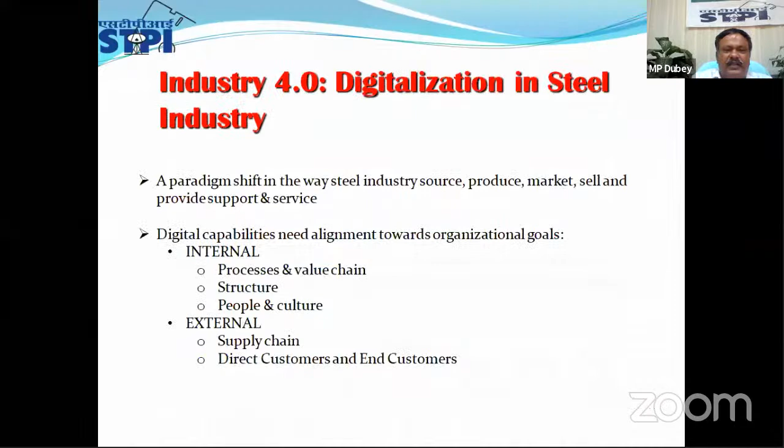So this is already something you have spoken about. Basically, in the digital age, an organization should adjust their production and logistics systems to meet new technologies. The main criteria are cost efficiency, customer centricity, and flexibility of production. Looking at overall growth, Industry 4.0 will play a very vital role in the growth of any company in terms of productivity and profitability.

So that's how Industry 4.0 comes in, with 9 different areas we are working on, called the TIED Center of Excellence: industrial robotics, where we are doing a lot of innovation and simulation work, system integration, Internet of Things (IoT), industrial IoT, artificial intelligence, industrial drones, cloud computing, additive manufacturing, industrial 3D printing, and big data.

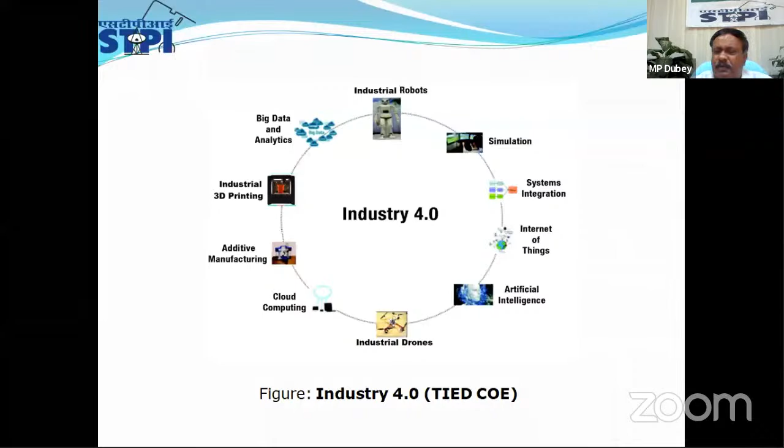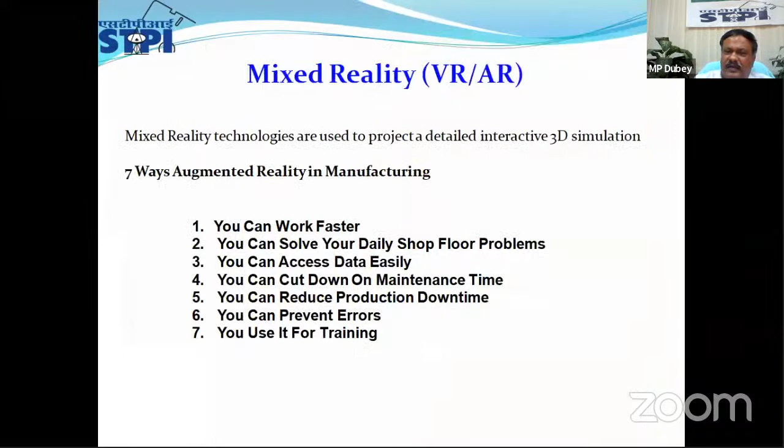With this, we have recently added AR and VR. These are all emerging technologies, and how these technologies will be implemented in the steel plant overall for the growth of Industry 4.0 - that's the thing I'd like to show you. The Government of India is already putting a lot of effort, it has come in the budget as an emerging technology. Wherever AI, ML and bioinformatics kind of things we are using, we are giving more and more incentive to those industries. So this is one new thing, AR, VR, which we have added.

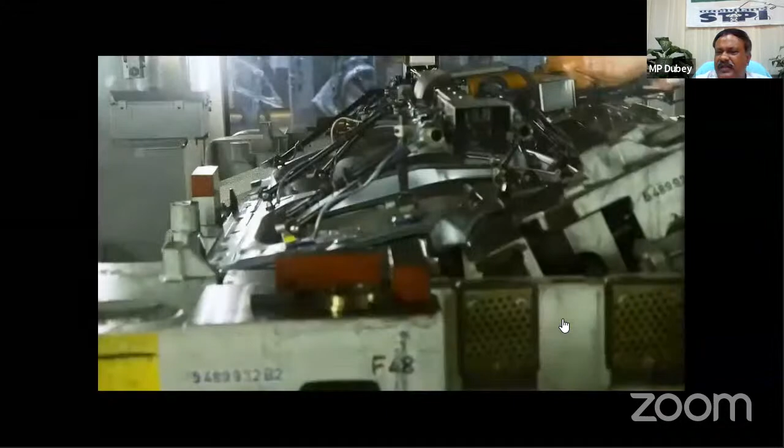Because of time constraint, I am not going to show you the whole thing, but basically through Google Glass you can simulate the activities. Cloud computing nowadays, wherever your developments are going on through technology, you can do it - like car manufacturing - and overall everything is correlated with the data. AI, data, IoT, when they come together and go to the manufacturing side, it will create a very win-win situation for the industry.

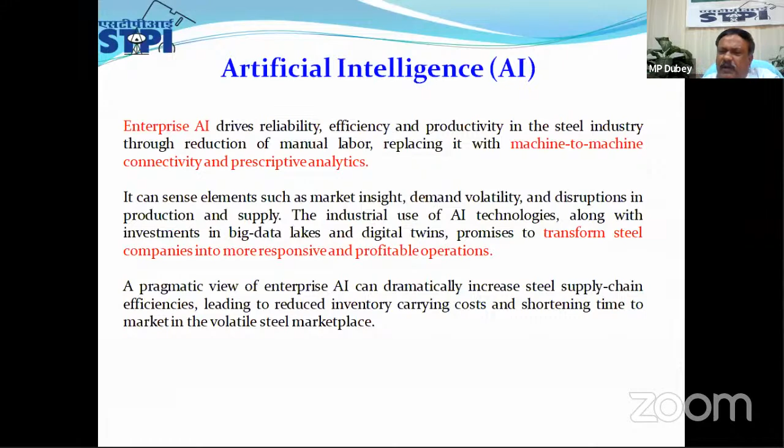This way, artificial intelligence - whatever Center of Excellence we are coming with, I will cover in another two slides. AI is our main focus, and the Government of India, Ministry of IT, is putting more and more effort on AI-based implementation of Industry 4.0.

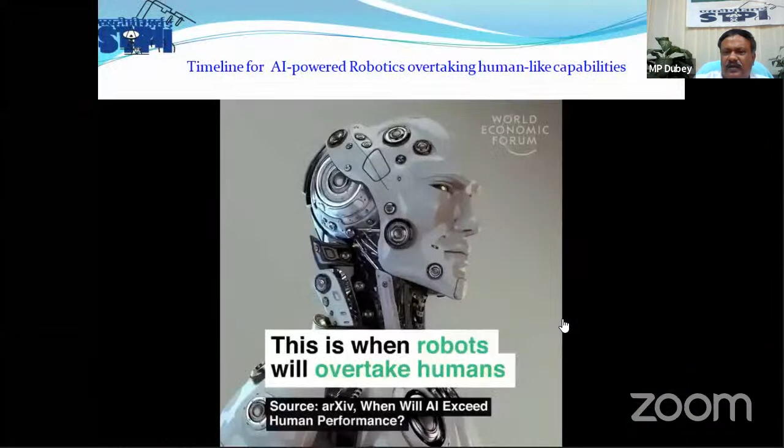If you see the global AI market, there is huge growth overall. That's why, when IoT and AI work together, it will make the overall manufacturing process faster and much better. So this is just to show you some videos to know about the overall picture.

The Government of India, MEITY, is already pumping a lot of effort by creating Centers of Excellence across the country. This is the Center of Excellence we have set up in Visakhapatnam for Industry 4.0, under the leadership and able chief mentorship of the CMD, RINL.

This COE consists of artificial intelligence, machine learning, industrial automation, industrial robotics, industrial drones, industrial IoT, and industrial 3D printing - one of the very latest technologies we have added, available in very few places across the world. This COE is also going to manufacture state-of-the-art 3D printing and AR/VR related technology powered by AI. This is the government's thinking - that everything should be powered by AI.

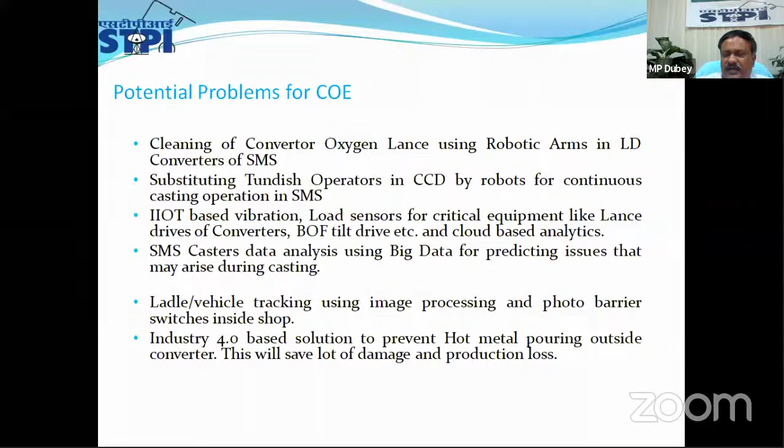So these are certain problems of the steel plants we have already identified, like cleaning of the converter oxygen lance using a robotics arm in the LD converter of SMS. Then IIoT-based vibration and load sensors for critical equipment like the lance drives of converters. Then SMS caster data analytics using big data for predicting issues that may arise during casting. So we have already identified certain problems, and now these problems will be given to young talent, who will be able to bring out the solutions. This is the basic idea of Industry 4.0.

Basically, on the steel industry we are working to bring more and more flexibility to the Center of Excellence. This is the Center of Excellence the Government of India has set up across India, and Visakhapatnam has been chosen for Industry 4.0, especially for the steel industry. We call this Smart Ukku - Ukku means steel.

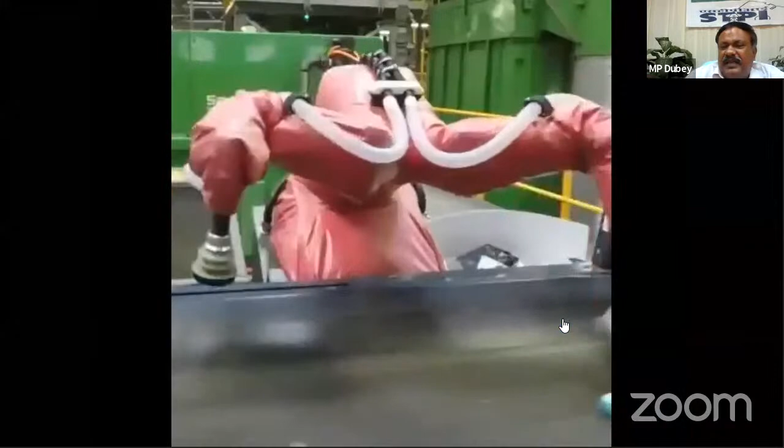These are the overall Center of Excellence activities we work on - we work with industry, we work with universities, we work with education institutes. Overall, if you see, this is the first cut view of the operations that are coming. Here what we are doing is segregating - this is where image processing is going on, including computer graphics.

This is the basic Center of Excellence we are running now. This is called Transformation of Industry through Innovation and Entrepreneurship Development - called TIDE Industry 4.0. The government agencies involved in this are the Ministry of IT, STPI, RINL, and the Government of Andhra Pradesh. To nurture more and more problems, we have also taken on industry leadership.

As part of the mentorship program, RINL is there, SMS Steel is there, ABB we are talking, Siemens is there, and EOS is basically helping us on 3D printing. The industry associations are there like CII and ITAP, and academic partners, IIM is there, and we are creating an ecosystem for innovation for making a successful venture in industry 4.0.

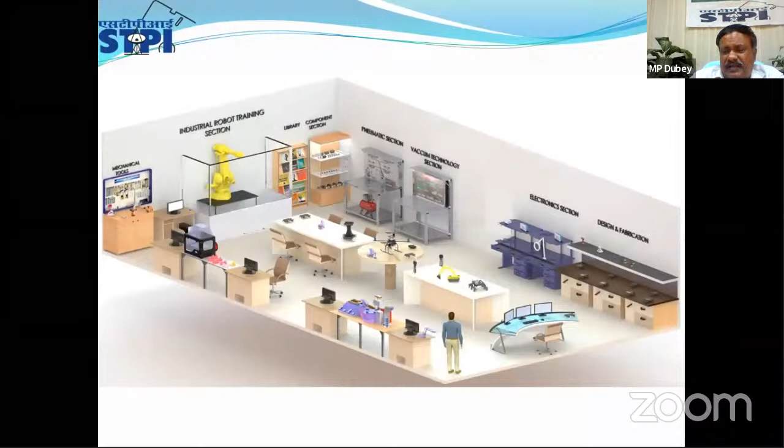So we have an innovation center of 10,000 square feet. We are coming with state-of-the-art laboratories looking towards the steel-based industry 4.0 applications. The government of India also has already chosen around 30 startups working on this area, where the seed fundings are based on their ability. The government gives initial level seed funding, and after that they can get funding from other sources also to nurture their product.

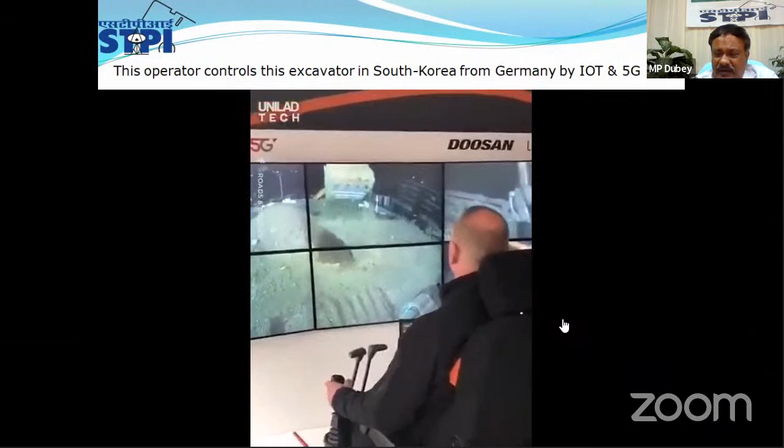So this is the IoT lab, and if you must be knowing, now an engineer sitting in Germany can through 5G and IoT application be able to deliver the work from South Korea. So like Bandhopadhyay sitting in the US can also help our Visakhapatnam startup COE by giving the technology that is already available. That is the thing I am saying.

In the robotics area, Visakhapatnam, you must be knowing, we have a lot of robotics centers here. Especially we are developing those robots. You must be seeing the hand robots which we are developing here are for surgical robots. And a similar kind of high-end robots we are designing for the steel-based manufacturing component. You see one of the robots developed here in Visakhapatnam is used for

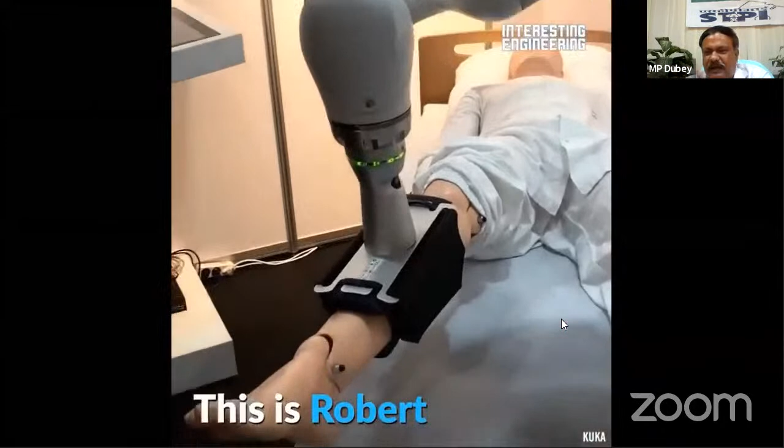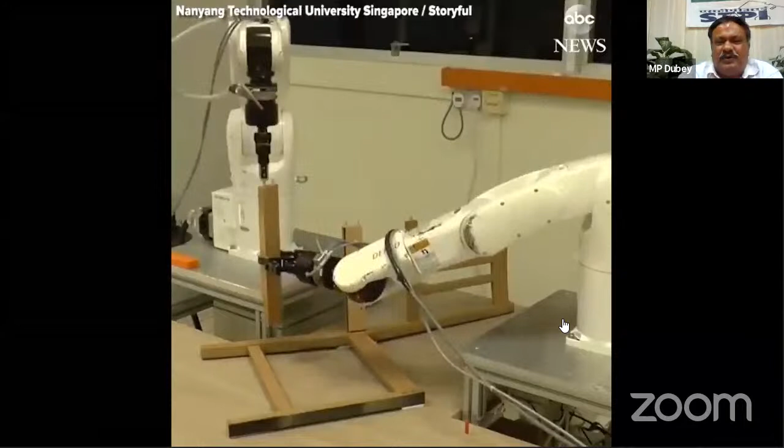physiotherapist applications. So that already implies it, and you see the kind of hand robots that are now so powerful. If you have certain problems, those problems can be easily solved through the two robots. Robot hands can do it - we don't require complete human robots nowadays. Two hand robots can do maximum kind of work. That is the thing. And you see the chair being assembled by two hand robots - very sophisticated, which shows the ecosystem we have in Vizag.

Many robots have been designed and developed. Similarly, we are going to see what type of robots are going to be used for our steel industry - which places, which problems we can solve through this.

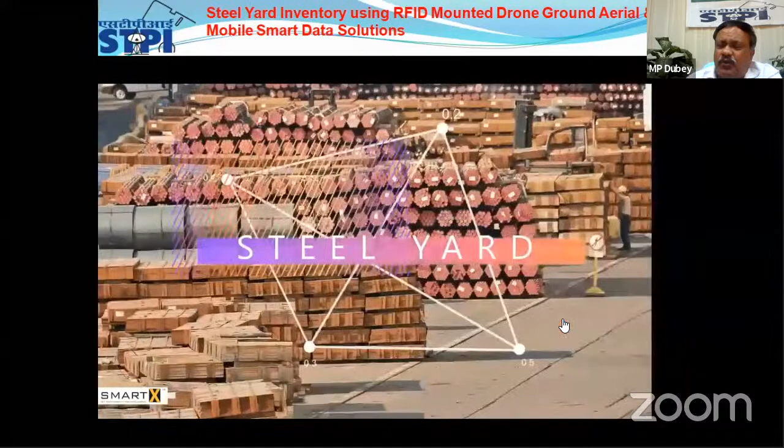Drone is another area we are developing, and already 5 manufacturing industries are here. Basically, we are thinking the drone is to find out your stockyard areas with tagging and other kinds of things.

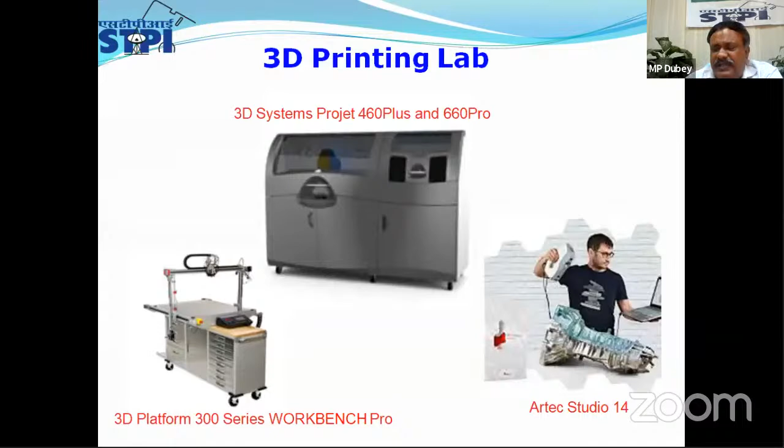3D printing - we have one of Asia's biggest 3D printers in Visakhapatnam. This is the picture of the 3D printers, and day by day we are improving what we want - basically we from Visakhapatnam are manufacturing the 3D printers here also. Over the period of time we are going for complex level components from the steel plant. The basic idea of why we are choosing 3D printer is that over time, complex components can also be done through 3D printing straight from the SMS. That is the basic thinking - we thought some of our problems are there, so manufacturing of complex 3D printed parts would also be possible. We are able to develop this in this center of excellence.

Now if you see industry 4.0 in primary steel making, how the COE is helping is that the industry should have a matured level 2 system with mathematical model for automatic blowing and scheduling of hot metal and continuous casting shop. On top of the level 2 system, there shall be manufacturing MES between ERP and level 2 system, and high speed internet is required wherever you go.

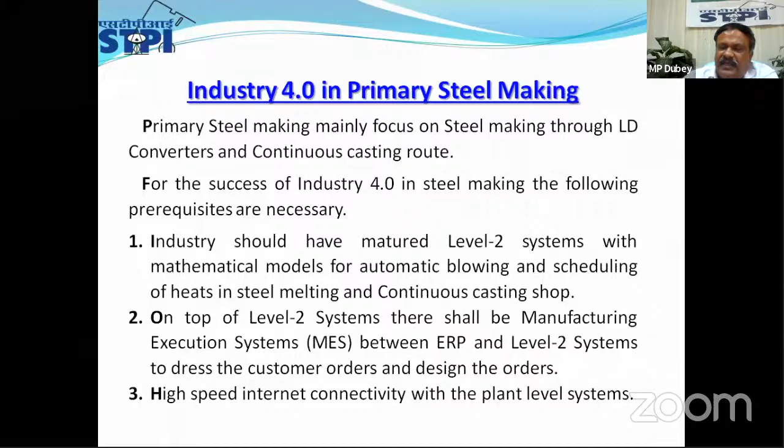So there are many problems - AI/ML based solutions can be attempted in the area of chemical prediction, mechanical properties in blast furnace, and other kinds of casting areas, rolling mill areas. These are the problems - essential spare parts which you are not getting, so 3D printer can play a very vital role in making the spare parts through 3D printing. Already our 3D printing machines are doing this activity, and there are many activities like AR/VR based goggles which are now being used in some of our COEs for maintenance of equipment, can be effectively used by operators to see through the equipment history while working.

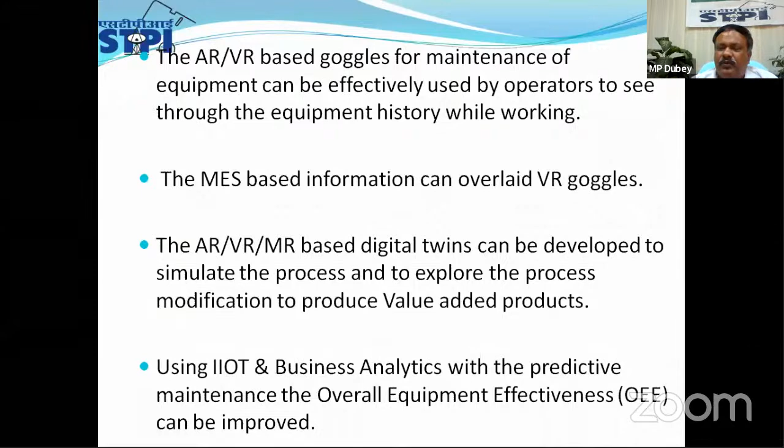So nowadays a technology driven steel plant will make more and more profit - that's the basic theme of my talk. The industry 4.0 technology can be explored to implement in the following areas of steel plant: production and productivity, industrial safety, employee health and safety, structure and equipment health monitoring, pollution monitoring, maintenance, product quality, waste reduction, and logistics.

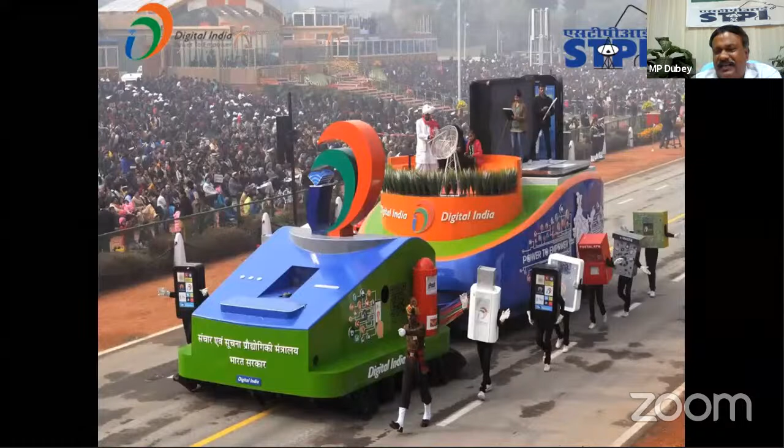Thank you so much, Mr. Dubey, for a very interactive and interesting presentation. Since you also mentioned Big River Steel in your presentation, I would request Mr. Bandyopadhyay if he would like to add something. I remember in the last webinar, Mr. Bandyopadhyay suggested that the focus of the centers of excellence should be on closed loop systems for quick decision making. So Mr. Bandyopadhyay, would you like to add anything to that today?

Mr. Dubey, as usual, very informative, and I'm really impressed with the kind of work your center is doing. As you are focusing on robotics and overall artificial intelligence, think about the pain points we have in the steel industry. I'll give you a very specific example. You also mentioned AR/VR and maintenance monitoring and all that. So think about situations where the caster is casting, and in our process we can see whether the defect is coming through or not after the rolling of the steel.

But in many cases, like a plate mill or even a thick slab cast or conventional hot strip mill, they don't see the defect in the coil till they roll it. And that could be many hours at least, and in some cases many days. Those defects originate in the casting, in the continuous casting. And most of the defects, Mr. Dubey, originate in the mold section, in the containment zone. There are also certain defects created during the secondary cooling.

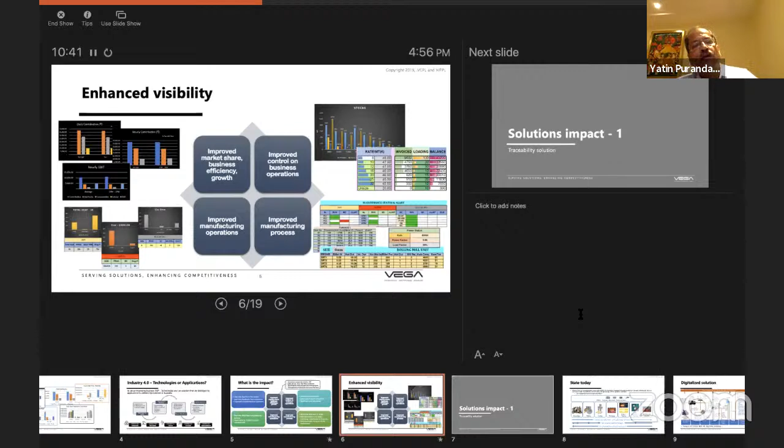So we have a few case studies here about Industry 4.0 solution impact. We are going to start with the first baby step, traceability, a simpler application to understand its importance as well as its effects.

The state today is a discrete process management. Especially raw material handling, melting and casting usually go together, but post-casting, reheating, rolling, yard management, and post-rolling processes are all individual processes needing a lot of coordination between managers and skilled personnel. Industry 4.0's first step, traceability, connects all these processes together.

By collecting the data, first the relation building between raw material and finished product is easily achieved. On one side, it gives the impact of a single QR code having the entire information of grade mix, melting data, chemistry, and the quality data of rolling.

On the other hand, it collects a huge number of parameters, typically about 50,000 parameters per 100 milliseconds. Now, using that data to model individual processes and optimize them for better performance is the key thing. So how this digitalization and integration works, as a sample case, starts right from scrap management.

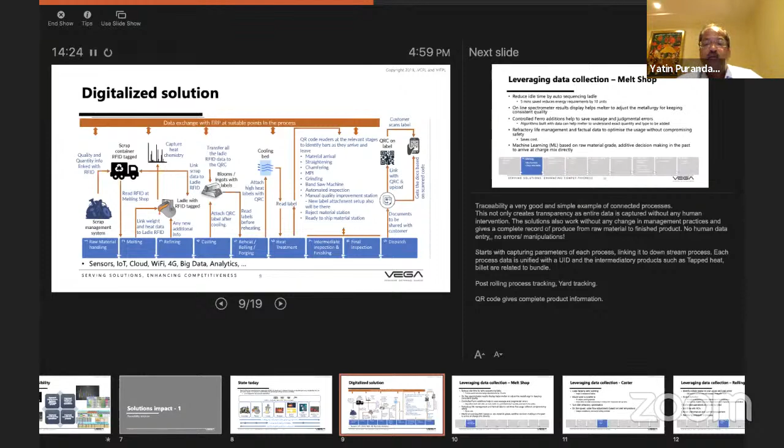So how can this data be leveraged in various areas? Today, in a melt shop, we can reduce the idle time of the ladle by sequencing it. Online spectrometer results can be displayed on the platform to the furnace operator for quick action. Controlled ferro additions help reduce the cost of high-cost alloys, and refractory life management gets factual data to optimize usage without compromising safety.

And of course, the second step could be understanding what charge mix gave what quality, slowly learning through machine learning, and creating a model of charge mix based on the quality demanded by the customer.

On the caster side, we can also look for the ladle tapping early warning system, so we do not have breakdown, blackout, or idle time of the ladle waiting, which creates energy loss. Mold wear-out pattern data, reflected in final product quality like rolling or casted billet, can give us patterns in future which can be used to correct the mold sequence or mold oscillations and control the output of the mold correctly.

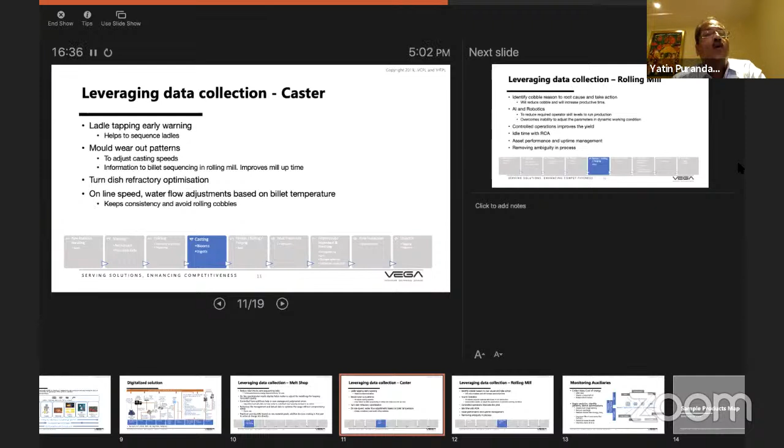Coming to the rolling mill, one of the last ends of steel production is identifying the reasons for cobble. Usually in secondary steel, a cobble percentage of 0.3 to 0.4% is accepted, but why that cobble happened has multiple variables which are very difficult to track down. Once we have complete end-to-end information about the charge mix, melting properties, and casting properties, it would be easier to understand the cobble and take actions to reduce the cobble rate further, which directly translates to money.

AI and robotics are critical areas, especially in the secondary steel market now, since productivities are increasing, and because of the induction furnace route, sometimes slitting is not possible. So high-speed rolling mills are a crucial aspect of control, including post-rolling, the bar handling area.

Introducing robotics, operatorless controls for these areas where the bar is tracked and parameter settings are automatically done, eliminates cobbles in that area and gives safety to the operations team since they don't have to be near the machine, and information is passed on to them.

Controlled operations - again, if I have all the quality data of the billet, and understand the reason for cobble, the temperature of the billet entering the rolling mill, how much crop cut I should keep so I can achieve better or best yield. The idle time in the mill also needs root cause analysis, because productivity is directly dependent on that - the larger the uptime, the larger the productivity.

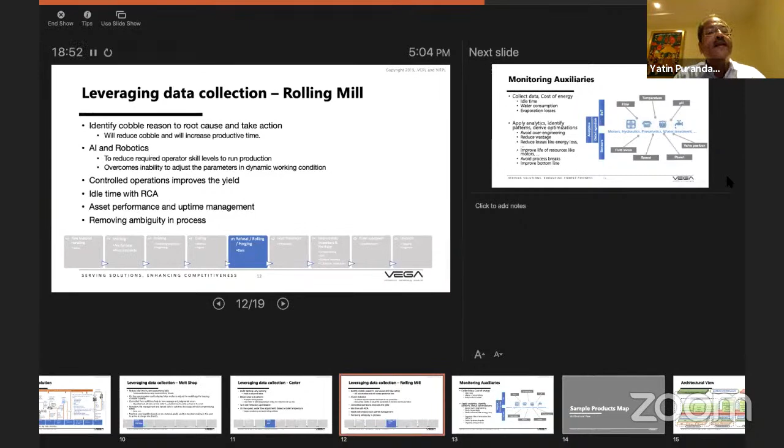Auxiliaries is an area people don't really look into closely, but they still contribute about 10 to 15 units of cost in the whole steel production. Monitoring each and every auxiliary system will help eliminate losses in terms of power factor or over-design of equipment, while also avoiding failures which may cause breakdowns in the main processes.

Connecting auxiliary systems with the main processes as a control part is part of a level 1 system, but understanding the importance and operational performance of this auxiliary system with respect to the product produced, we can well control costs by controlling energy as well as performance, and the failure rate of such auxiliary systems. Now, is this all achievable?

As we look into this, it looks like a very complex process, but with today's technology in telecommunication and IIoT, all this is feasible. So Vega has prepared a broad architecture for Industry 4.0 long-term solutions, which contains a common IoT data platform where entire plant data - process data, business data, information coming through emails or WhatsApp - is gathered together and correlated to form different applications in different areas, module by module.

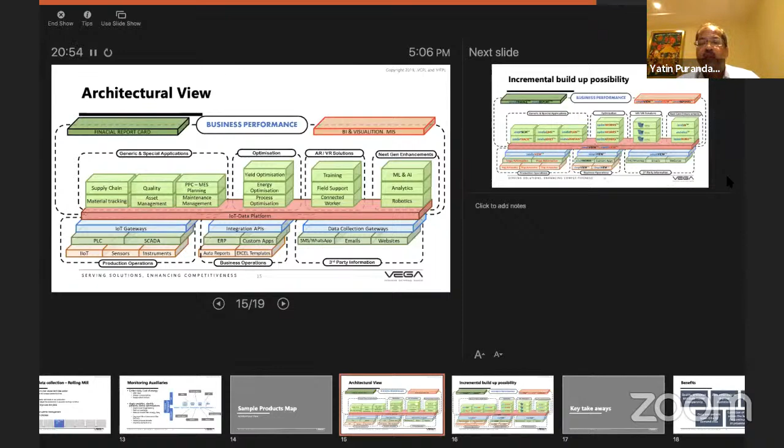So there's no need for full investment altogether - go in baby steps, achieve one part, reinvest whatever is earned back into the process, and head towards being an Industry 4.0 compliant company in future. This is what Vega's product map is based on, this architecture.

So we have process automation systems, production operation automation systems. We have ERPs, SAPs, or similar products. Vega SimplyWorks is one of the products in that category. We have SMS, WhatsApp, email, websites, data connected to this platform. I get LME or RBI dollar rate every day in the morning, automatically downloaded in the system without any intervention. Machine learning is used for collecting mail information and converting it into data which is useful in the system.

And then we have traceability, asset management applications. We have optimizing applications. We have connected worker or operator 4.0 through AR/VR solutions. And we also have artificial intelligence based modeling, analytical modeling, and robotic controls over and above these platforms.

So what are the key takeaways I would suggest in this? Quality and processes, as well as stakeholders data transparency. Avoiding human data entry makes it zero error data. Real-time data helps decision makers take quick decisions. Data everywhere, mobility saves time. So no data needs to be demanded. I can get the data what I want.

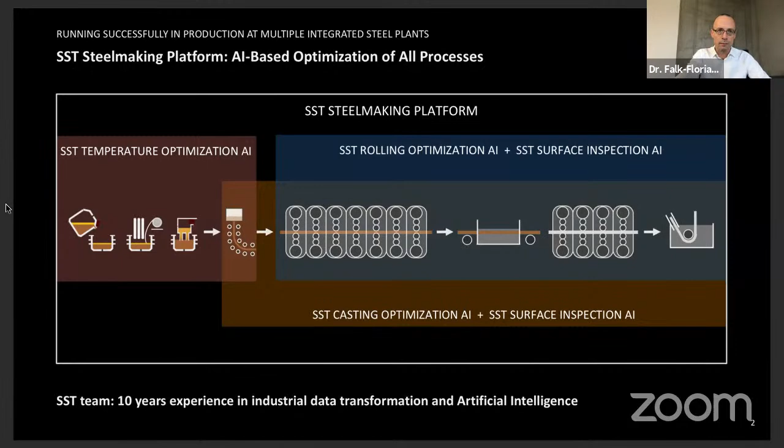There's, up to my knowledge, no other supplier who has a similar solution. But before we go into the details, let me shortly list the areas where you can save money when you apply artificial intelligence methods to the casting process.

The first area is slab and coil downgrades. In particular, those are very costly if you can only discover the defect downstream after processing the coil in the hot rolling mill, processing it in the pickling line, cold rolling it, and finally galvanizing it. So for instance, sliver defects can often only be detected after galvanizing at the last step, and this is extremely costly.

The second area is energy. If you manage to reduce the defect rate in casting permanently, then you can move certain steel grades from cold charging to hot charging. The third area, obviously, is production throughput. And finally, there is also the opportunity to reduce the slab repair costs.

For a 5 million ton plant, a solid estimation of the savings is 6 million euros. This is a very solid estimation from my point of view.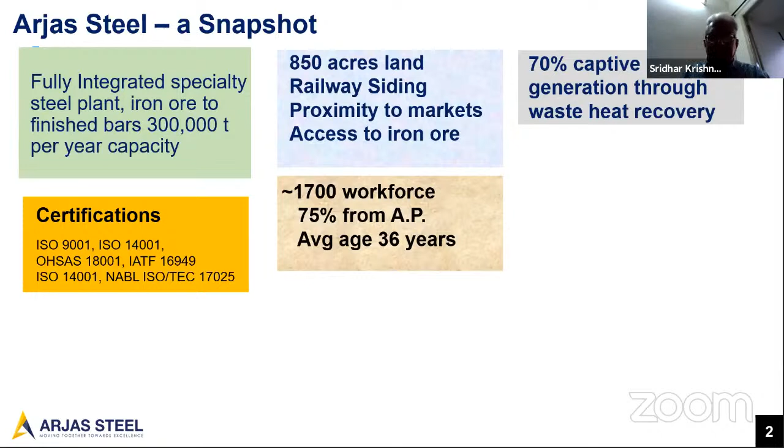We are next to a railway siding, close to the automotive market. We generate about 70% captive power. We are fully certified to serve the auto industry. We have a workforce of about 1,700 people, a very young workforce, so that's a good advantage for me to push forward some of these concepts.

Products we make are alloy steel bars in various profiles, heat treated and bright bars. We have strong management systems in place, which is basic bread and butter for being in the automotive business. We started the process of digitalization and bringing certain IoT solutions where it helps the business improve its efficiency, consistency, reliability. I'll have examples after that.

We have a good quality assurance system. Main market is automotive, but we also sell a bit into energy, railways, and some infrastructure areas.

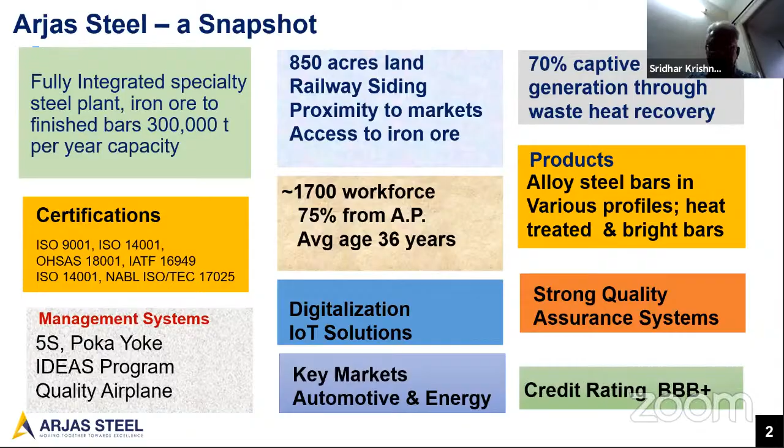So we have a vision to create value for our shareholders. That's the most important thing, and to be in India a leading special steel producer — I'm happy to say we are probably in the top 3, top 4 among various customers. And the kind of company we want to build is a company that's open, where people are accountable and fully empowered to take responsibility seriously. So this is the process.

So we have a coke oven plant, a blast furnace, mini blast furnace, a sinter plant, PCI, BOF converter, ladle refining, vacuum degassing, casting, and we have fully automated and semi-automated inspection lines.

We basically check post the rolling of the bar, we check the internal soundness of the product, surface defects, any cracks that may open up when forging. It automatically detects and pushes the product out for rework. Some of it can be reworked and reclaimed, and some of it ends up as non-prime.

So today, our online rejection rates are about maybe 15%, but after recovery, it depends on the grade, we are within about 2% after recovery.

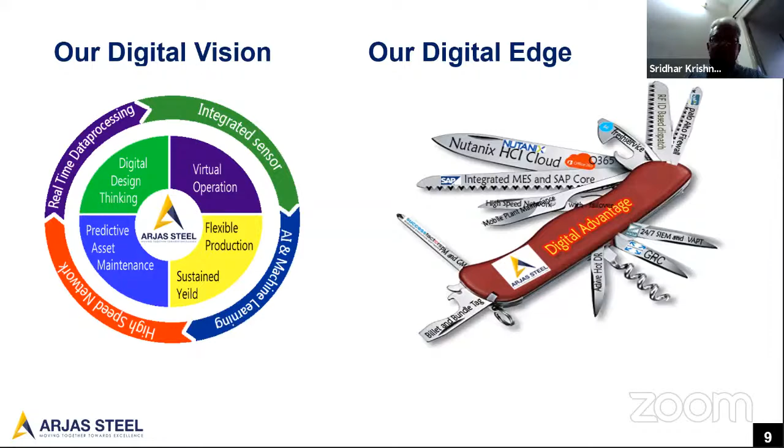As you can see in this generic picture, depending on the work function, the complexity and the solution varies, and also the impact. Our digital initiatives are always supported by what they can do for the business, whether it helps us save time, money, reduce costs, increase the available time of the various units, and that's how we measure it.

We have PLCs and SCADA systems in different parts of the plant, and above that there is a program called QMOS, similar to some systems we talked about earlier, where it allows us to feed recipes of various steels, take samples, and move all the chemistries from one process unit to the other without any human interaction. It also tells the operator what kind of ferroalloys to be added, etc., and supports the operator in his decision making.

This is specifically designed for the special steel industry, predominantly used in the US and some other parts, I guess. We also now have a QMOS developer in our office looking to improve the capability of that system.

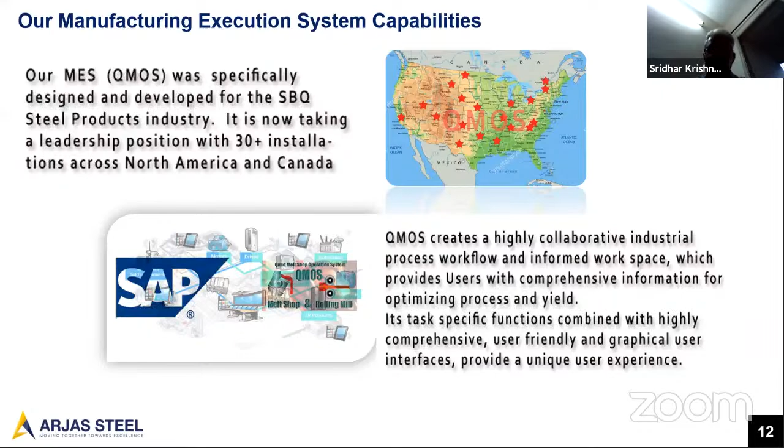So we have introduced solutions in different areas that help that particular function: an alloy calculator for optimizing the alloy mix, where there's clearly a quality impact and a cost impact; RFID tagging for in and outbound vehicles; billet tagging to trace billets. We have a 3-strand caster, so X, Y, Z, and we are tracking quality issues right up to which heat it was made and from which billet the problem happened. We have this MES system called QMOS, which runs across different units.

And then we have core digitization, so basically any operational or IT systems are all on a single platform. Now we have migrated to Office 365, and most of our systems or solutions are based on the SharePoint platform. And now we are in the process of developing some business analytics to help us take decisions faster.

So these are some pictures of how we capture the weight of the bundle and how the tag is printed and how it is validated through a mobile device, because often the operator is out in the field in the bar yard and he needs to know which bundle to check, because one of the critical things we have is the wrong grade and wrong item should not go to the customer, because once it's processed and becomes a part and goes into the vehicle, the commercial consequences of a mix-up are too high.

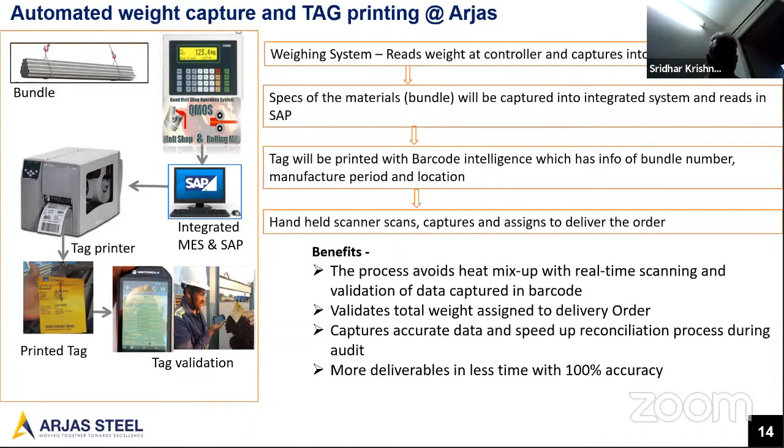Can you still see me? My computer says my internet is unstable. Mr. Krishnamurthy, sorry to interrupt you, I think your connection is a little weak because your voice is breaking off. Okay, how about now? Yeah, it is better now. Well, let me try my best.

So we also have barcoding on various bundles. This helps also locate inventory and store our inventory in a more intelligent manner.

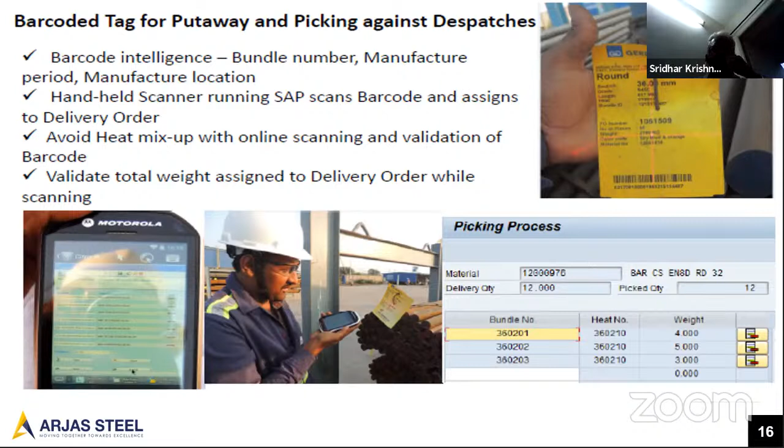We introduce mobile plant maintenance. So basically we have a barcode on the different equipment, and whenever maintenance is done, an entry is made into that particular asset for when it was last maintained, confirming the operator actually went there and did something. We also have better control on exactly what assets we have and how efficiently we are maintaining them.

We have also introduced, on the back of SAP through the SuccessFactors module, a lot of HR functions. So wherever we are, on mobile as well as online, we can do certain functions which has avoided creating paper forms. Now we are slowly in the process of adding performance management as well, so all our targets and monthly reviews will be done through SuccessFactors.

So we have moved away from acquiring computers and laptops, and wherever possible we are leasing them. Everything is stored, and we have made it flexible enough that when people are using the interfaces, there is no way data can be stolen or a virus introduced by inserting a memory stick. So everything is basically stored on the cloud and also backed up, so in case of a laptop crash or something, we are not losing any data.

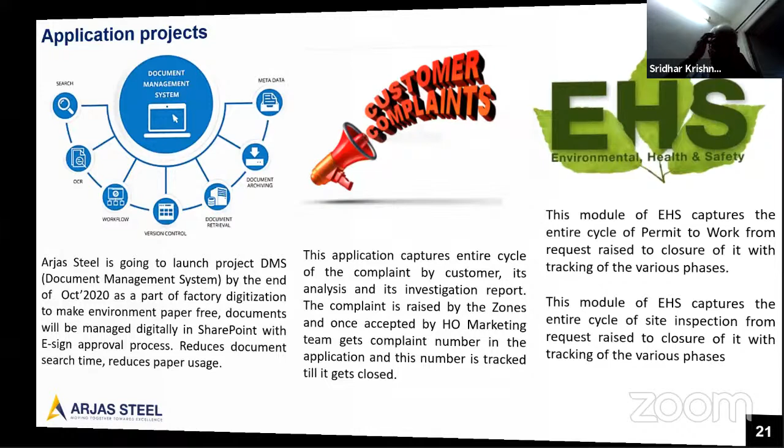So across the plant, or across the various departments, all the sign-offs will happen online, and the system will keep track of the jobs and also secure a copy. The other thing we're doing is putting customer complaints and environment, health and safety metrics on a platform, so we can trace back what the issues are. This document management system is something we're just rolling out as of this week.

These are some of the projects that are ongoing right now. We have stores where we are bringing in some level of automation, along with the warehouse management module, so that we don't have duplicate items stored, the same item stored under 2 different codes and unnecessarily blocking inventory.

We have an intranet that is coming up. We have a self-service tool, so for any change of password, the user can manage it himself. And now we also have e-invoicing, etc., that's coming.

So overall, I think a lot of these solutions, as you saw, take more of a business-focused approach. At the plant level, we have QMOS as our core platform to drive innovation and automation. Increasingly, that will be our focus, where we will be able to predict some of these quality issues I told you about, rather than react to them at the end.

So the topic for today is primary and secondary steel making. In the last webinar, we spoke about the learning steel plant as a whole, and today we will focus on primary and secondary steel making.

When we talk about the learning steel plant, there are 4 different categories you would like to focus on: starting from asset health, then product quality, then production planning, and lastly energy. And of course you need machine learning algorithms. With this, typically our customers are able to achieve 6 to 8% EBITDA improvement.

Let us look at these categories in detail. When you talk about predictive asset health, your main target is to have lower maintenance cost or lower downtime, so your productivity increases. We have 39 references with various solutions in that.

The next step would be predictive quality. This is really important, that you are able to predict what your quality would be considering the current situation. Typical KPIs here could be lower cost of quality, producing without downgrading the material, or in other words maximizing your prime quality products. With predictive planning, basically you are trying to increase EBIT by improving the OTIF, on time in full performance.

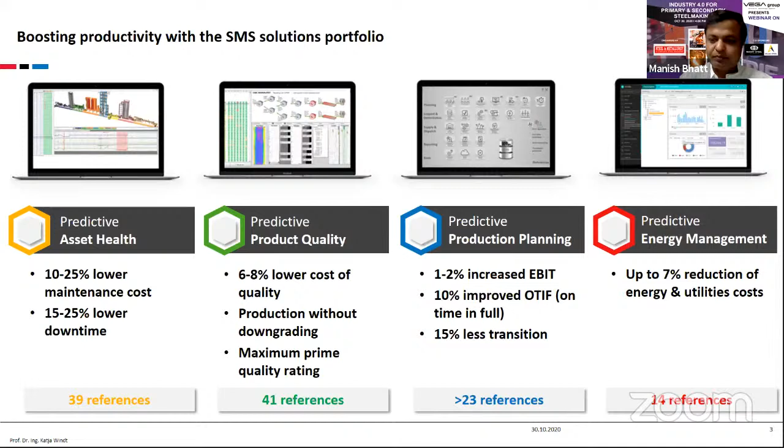So these are more or less 4 different categories, and all of these categories are important. But what is more important is the interrelation between these categories. Let's say you have a production planning system. When you make a plan, you would like to check what is the planned maintenance time of that equipment. And once you have this information of maintenance time planning, you would like to consider this in your production planning.

The next phase, maybe you would like to check what quality could be performed. So you get a customer order and then you would like to check with your quality system: can I produce this quality? Then you would like to get an answer, yes or no, and make your firm production planning. But while checking the quality management system, you would also like to check the process condition.

So, are my process conditions currently good enough to give me the desired quality? If yes, then you should give feedback to the quality system and again back to the planning system. And if not, then also that information should be available.

So if you are trying to assess your condition monitoring or plant condition, you would also like to check what is the scheduled maintenance time. Let's say, for example, your hot strip mill is not at peak performance or stable rolling condition, then you would like to check when is the scheduled next maintenance. By that time you will most probably overcome this problem, and then you can schedule this product into the production planning system. So basically what we are saying is the interconnections between these different systems of condition, quality, planning, and energy are really important.

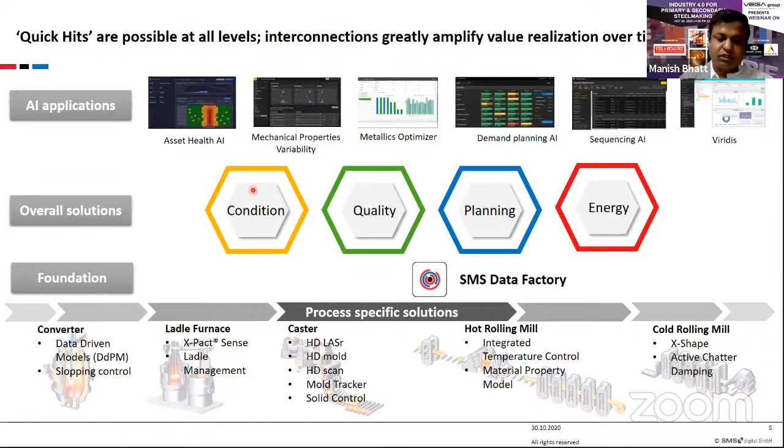So we have process specific solutions for each process unit, then we have the data factory, which is a unique source of truth for everything. There are 4 different categories in which all the solutions can be met, and at the top we have AI application. In the last webinar, we focused up to this area. This time, since it is primary and secondary steel making, I will focus on some of the AI applications that would be applicable in those areas.

So the first example is slopping prevention in the converter. With this AI application, we are getting the audio and visual signal from the converter. We are also getting the level 1 and level 2 data, and combining both things we are making the prediction model. This prediction model is able to predict when the slopping is going to happen and why it happens. Based on this, it gives automatic process adjustment to level 2, what should be done to avoid this slopping so it doesn't happen. So it is not only detection, it is also prediction and prevention. Typically, customers are able to save $900,000 annually.

We discussed something about alloying yield. In secondary steel making, the main challenge every steel producer and special steel producer has is the prediction of the yield of alloy. Or if we talk about electric arc furnace, you would like to predict the yield of the scrap, or every chemical element in the scrap. So this AI application provides information on the chemical composition of the scrap, for example in EAF. If you have a scrap-based arc furnace, the chemical composition of the scrap is usually a big question mark. But this being the raw material, this is also where you could achieve the highest impact to your OPEX. So based on the AI inputs, we are predicting what would be the yield of each chemical element, and based on this yield calculation, you can decide what would be the cheapest charge mix.

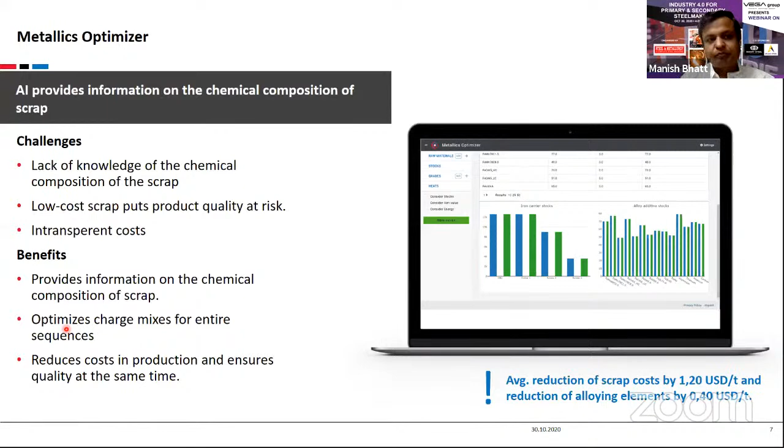Going one step further, now we are talking about the whole melt shop, starting from the arc furnace to the caster. When we look at the whole steel making operation, what you do in one step is important, but that is not the final goal. Your final goal in steel making is to get the target temperature in the tundish, or the target temperature during casting. This is, let's say, the final target in the whole steel making process. Variation in this temperature can really impact the quality of the steel, or as we discussed, you would like to have a really good hitting rate on this temperature. So this is basically the challenge we face here.

Because all the level 2 models are focusing on each process unit, you have a level 2 model for the arc furnace, ladle furnace, vacuum degasser, or the caster. But you need one module which is focusing on the whole steel making process as a whole, and which is focusing on the caster temperature. So here our solution is the combination of a data-driven prediction model and our level 2 metallurgical models. This takes a holistic view of the complete secondary steel making process. It also considers the ladle management system, so you could optimize your ladle heating with this. Once you achieve this, you would like to set the optimized target temperature or planning temperature for, for example, the EAF or the BOF. You would also like to improve the hitting rate at the caster tundish.

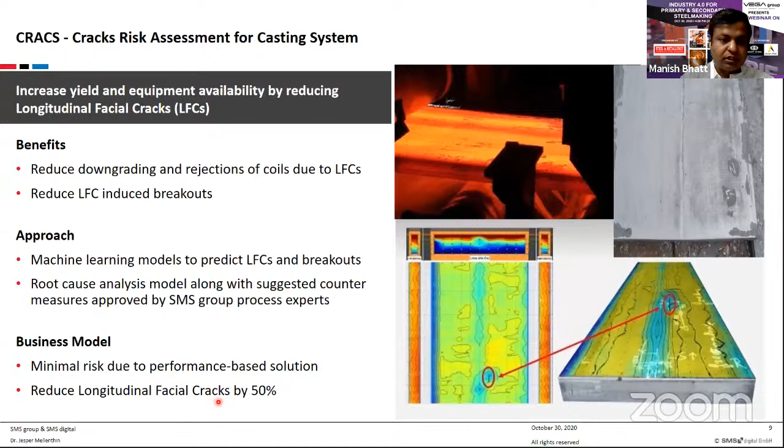One example is Shougang in China, where surface defects were 35% less after 1 year of operation, and the payback for this alone would be 1 million euro per annum. By the way, this system has more than 41 references worldwide.

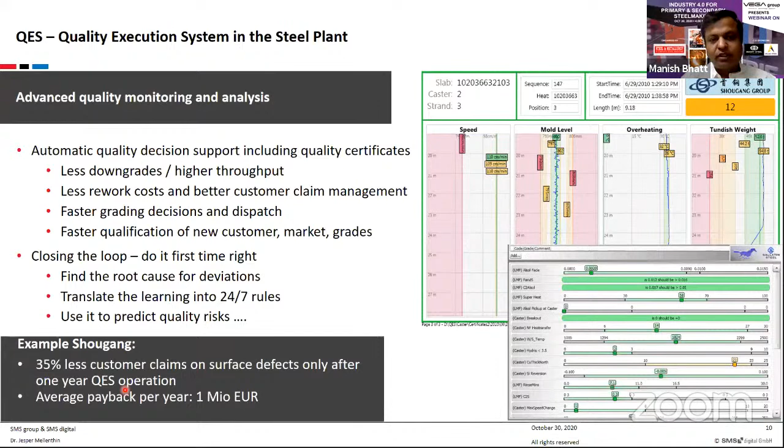The last topic for today is predictive energy management. We have Viridis, the energy platform. Here you focus on energy efficiency, reducing the unit cost of energy through better planning, and overall energy management so that you reduce your carbon footprint. We have multiple references in that. Till now we have managed more than 352 petajoules for many customers worldwide.

That's a quick overview of our AI applications in primary and secondary steel making. Thank you very much. You can reach me on this. Thank you.

Thank you very much, Mr. Bhatt, for a very precise and good presentation. I have a question for you: regarding the predictive energy management you mentioned, what are the parameters that the model takes as input? What parameters do you consider for the energy management?

You need to take the parameters from your level 3 system for the planning - what was the planning. Then you need to take the parameters from your level 2, because that is where the tracking is happening. And you will also need some signals from level 1. So level 2 and level 3 definitely you will need, and in some cases also the level 1 signal. You need to have connection to all your process parameters, because you would like to understand, for example, how energy consumption changes from one product grade to another, one dimension to another, and so on. So you need to take data from level 1 to level 3 systems.

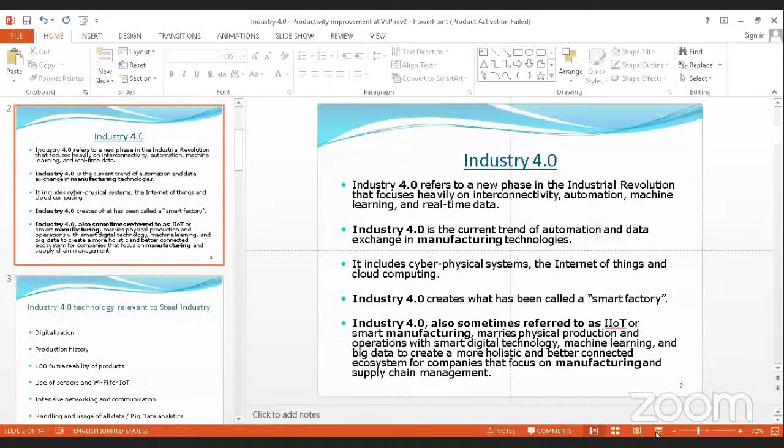Good evening to all the participants for this late evening, and also to those who are from different time zones, good afternoon, or whatever is the time. What I am going to present here is in conjunction with our steel plant, the Visakhapatnam Steel Plant I belong to, regarding Industry 4.0, what we do and what we expect.

Here you find that it is only the definition of what Industry 4.0 says. I think all the audience here and the panelists are aware. Still, I say one thing in this regard: it is the expectation of the industry that the computerization level further improves, and it helps in avoiding human touch or dependence in the production process. Any steel plant will look for two things: one is productivity improvement, cost reduction, and basically quality management, better quality management.

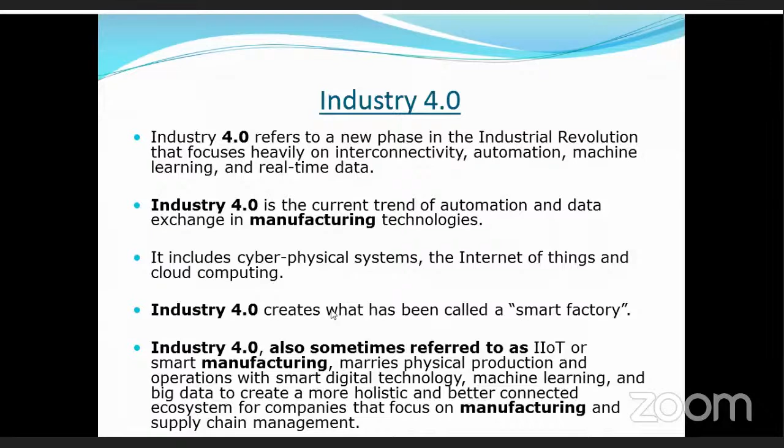While doing this Industry 4.0 technology implementation in the steel industry, we understand there are a few things which give us strength. One is digitalization, going by production history, then traceability of products 100%, use of sensors and Wi-Fi for IoT, intensive networking and communication, and also usage of big data analytics and AI/ML in these areas.

While doing this study, being a last presenter, or maybe last but one presenter, many things are covered earlier, but still to have continuity of the presentation, I still need to repeat a bit. The generic area of projects, what we understand are important from the steel plant point of view or the manufacturer point of view, are power and energy use versus production monitoring for cost optimization. We should always try to track how much power and energy we are using, so that the cost of power and energy per ton of steel production is minimized or optimized.

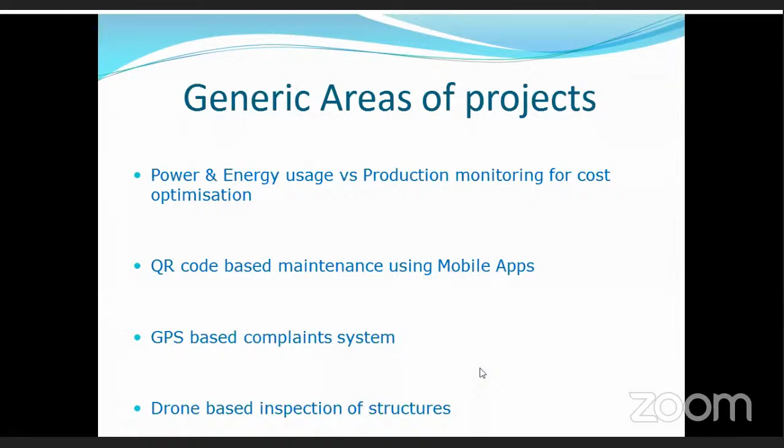I mean, not for finished products, but for raw materials, drones can be used to a good extent for a steel plant, and it can be a part of this Industry 4.0 implementation. Similarly, a few more things are there, like gas detection systems for safety.

If some trace of gas like carbon monoxide is there—gases like BF gas, coke oven gas, and steel melt shop gas—these gases can create fatal accidents or some disablement. So that is also one important thing.

Similarly, creating a suitable interface with the level 1 system, so that if the level 2 system is temporarily not available, production can still go on without level 2, but the parameters can be passed on to level 3 or level 4 ERP system. Usage of sensors to get online vibration and temperature for critical equipment.

Already one of my preceding speakers has pointed this out. Then water level measurement at the reservoir, because as you know, a steel plant requires a lot of water, and for Visakhapatnam Steel Plant we require to store it in a reservoir, and many other steel plants also require it. So that is also one important thing.

QR code based material tracking—that is also traceability, that is also one important thing. QR code based maintenance is also another activity we take up. So QR codes are also nowadays being used very predominantly and extensively.

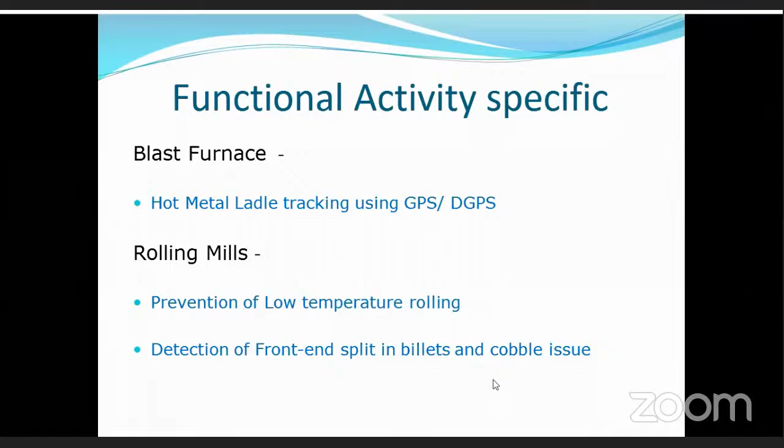Then rolling mills have certain areas of expectation from Industry 4.0, like prevention of low temperature rolling, detection of front-end split in billets and cobble issues. If it is detected in the beginning itself, for the first case of happening, that can help prevent further production of defective products, and it will help in cost cutting, or rather cost optimization.

Similarly, the steel melt shop has certain requirements, like billet and bloom identification using marking or spraying from machines, so that the billet or bloom, whenever it is either directly dispatched or used for further rolling, can be correctly identified and properly rolled.

Because when production quantity is high, there will be various grades, various production sequences, and heats. So there is a chance of mismatch, a chance of mix-up, and people may make mistakes, ultimately leading to suffering of the customer and customer complaints.

Usage of thermal imaging to check lining condition—we should have thermal imaging facility so that there is not much cracking or damage, or we can predict that the lining can no longer continue to be used.

Use of handheld devices for ladle number entry from pulpits, then measurement of hot metal or steel weights in the ladle converter. It can be done by a radar level instrument and a suitable empirical formula.

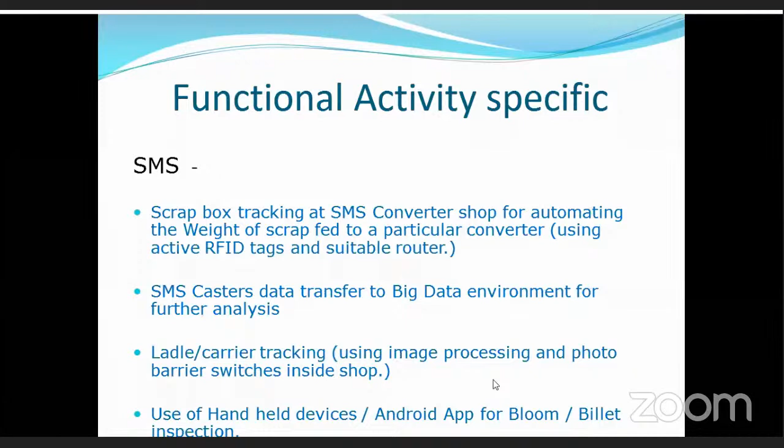Handheld devices for billet and bloom inspection—if the billet or bloom is marked with embossing, painting, or stamping, that information can be read by the handheld device while dispatching, so dependence on human beings will be less. Steel temperature monitoring in the tundish to avoid choking and machine closures is also important.

Vibration load centers for critical equipment like lance drives, converters, BOF tilt drive, etc. Continuous monitoring can be very important, and whenever there is an alarming level, it can give immediate information to the shop in charge that something is going to happen, so further immediate checking is necessary. Similarly, steel ladle lining scanning and data transmission to level 1 for predicting ladle failures can help in avoiding ladle through or such type of problems.

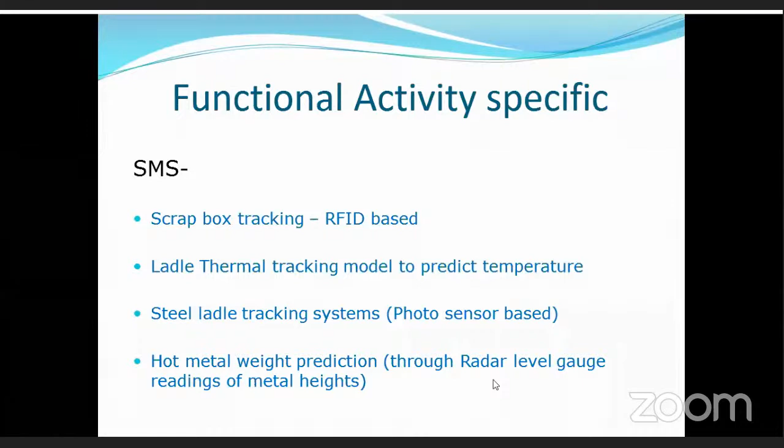Scrap box can be tracked based on RFID. Ladle thermal tracking model can help in predicting the temperature in the ladle. Steel ladle tracking system by photosensor can give the position where it is now, so that which one is earlier and which one is later can be identified. Hot metal weight prediction also can be useful for measurements and prediction.

Finished product - now I am going for customer centric requirements which are also very important. One is tracking finished product till the customer custody for quality and production information. This can be achieved, and many players are achieving it, by either barcode or QR code, in such a way that it is not easily destroyed. It will have life, so that the customer himself can know the lot of this production, the grade, the property, and other information from the QR code data. Provide availability information for the customer to plan their procurement.

This is another thing, because our steel plant produces mostly structurals, long products. So we produce not exactly based on only customers' requirement, but based on optimization of other factors, including customers' requirements. So whenever there is a requirement at some branch location outstation, the customer can know beforehand when the material can be expected to be available in the stockyard.

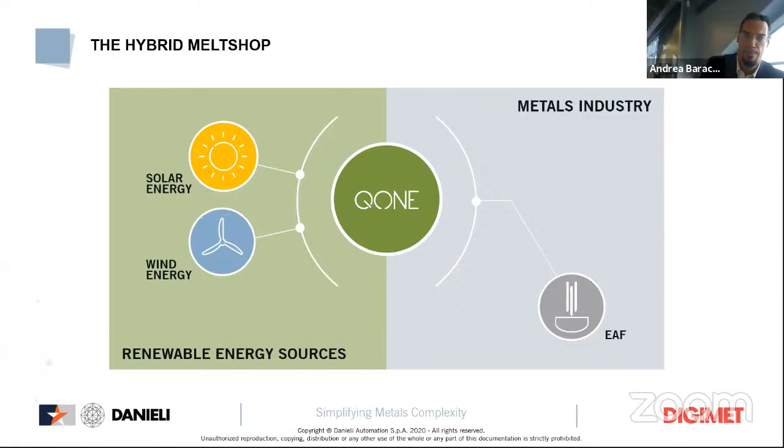We face today a transition going on day by day towards a more efficient and sustainable operating plant. This transition is driven by many accelerators, like improving energy and material efficiency, and introducing innovative low carbon footprint technologies. In many cases, as we said, this is due to government regulations limiting CO2 emissions, for example.

Another accelerator is the management of the use of energies. And last but not least is the possibility to utilize large amounts of information gathered from the plant to retrieve useful information from that.

All those enabling technologies are contributing to create the so-called intelligent plant, made with the aim to further and continuously optimize operating costs and also look at the sustainability of the process.

The factors contributing to creating an intelligent plant are a modern automation system capable of monitoring equipment and energy consumption in real time, the use of robotic applications to reduce manual interventions, and on the other side, to preserve human beings from exposure to dangerous working conditions.

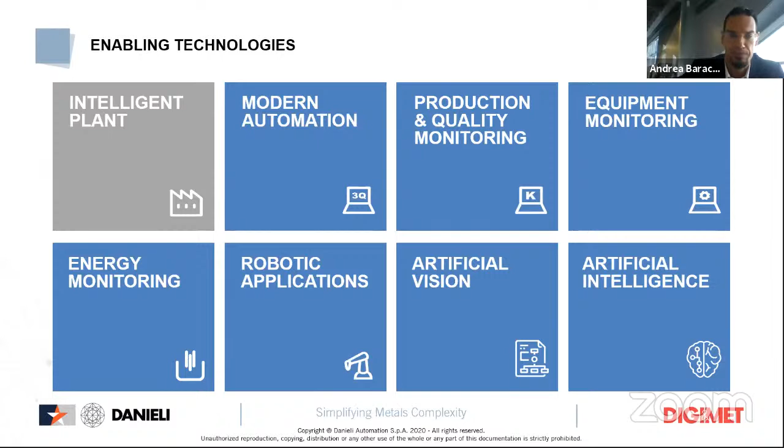And then we have all the new horizons offered by artificial intelligence. The intelligent plant is capable of self-optimizing and improving the production process and product quality.

According to the Danieli vision, an intelligent plant is equipped with the Q3 pulpit, a new concept of plant supervision, where decision makers, foremen, and users are supported other than by the traditional systems we are familiar with, also by analytic tools and predictive systems which provide guidance to the operators alongside the classical model-based approach.

Such plants are designed to be managed from one unified control room, where smart controls support operators, and the number of people required to be present on the field is always less and less, targeting no man on the floor.

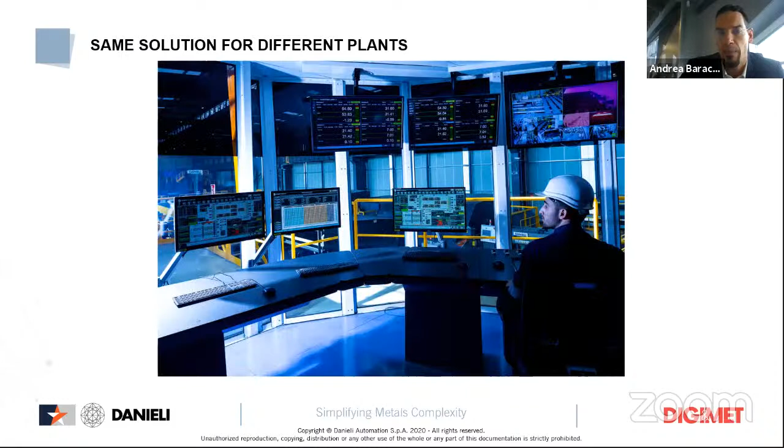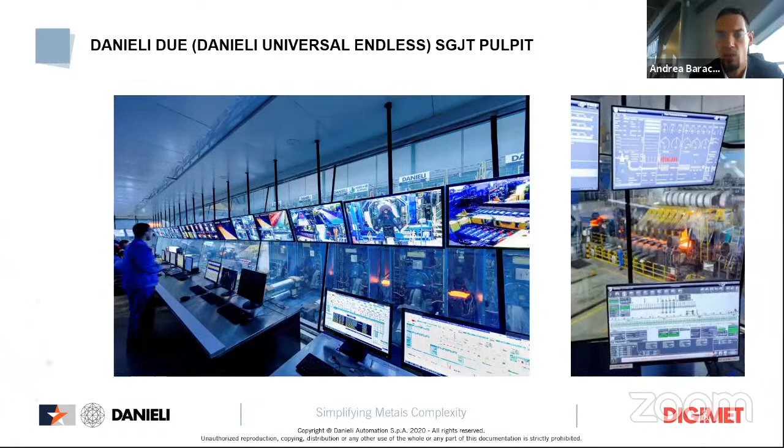Such technology is a reality today at Danieli, and it is already applied in the plants that we make for our customers. You see some pictures taken from the most recent projects executed worldwide. One of those is the Danieli Universal Endless Mill in Shagang Jintan, a high-efficiency plant where the melt shop and the caster are linked together up to the hot rolling.

The next generation pulpit is a concept where the automation system interacts with users to enhance the perception of operators of a dynamic process, changeably together with the material flow into the mill. The next generation pulpit will interact with operators, offering them the right information at the right time based on the actual process going on.

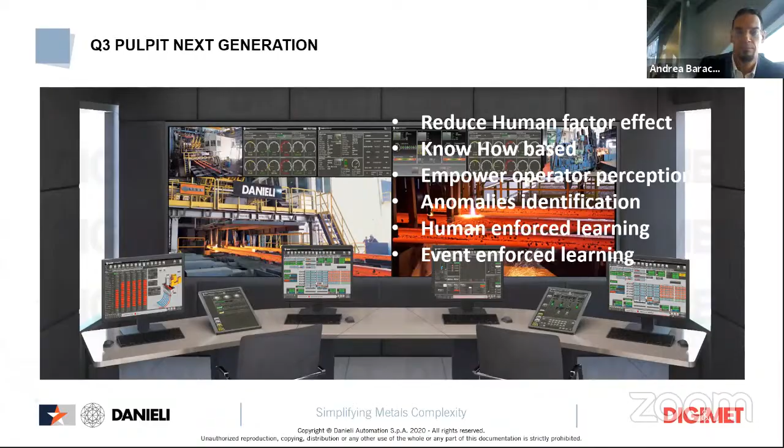Modern plants are crowded with data sources. It's possible to collect a variety of information from different sources along the plant and apply on top of this data business intelligence techniques, using tools like Q3 Intelligence, that allow us to translate such a large amount of data into useful information. This then becomes a trigger for process monitoring, detecting anomalies, and monitoring consumptions.

The benefits of this kind of approach are immediately understandable if we look at the perspective of yield optimization, the reduction of the number of defects, and also the limitation of energy consumption.

If we want to move forward and contribute online with the guidance of the process, leveraging our experience in process control and the Danieli know-how on the metal business, we have developed a platform called Q3 platform, dedicated to the implementation of statistical approaches and artificial intelligence solutions for specific needs of the steel business.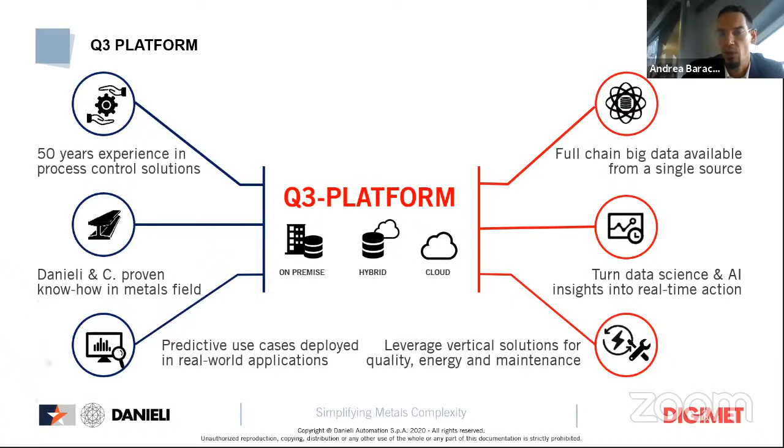Especially in this time of limited people interaction and movement, the flow of information has become a crucial factor. For activities where human intervention is still a must, like maintenance operations, we are adopting QSpace One, a virtual collaboration platform allowing us to share videos, propose advanced collaboration functions, send and receive virtual contents, and track activities performed.

This kind of system is utilized from the early stage of a project, supporting surveys, especially when we talk about modernization of existing plants, supporting tests before dispatching new equipment to the site, and also supporting commissioning and post-commissioning assistance activities.

I'm showing you a short sequence of images captured from our FAT test, factory acceptance test execution, performed with the technicians of Danieli Automation in front of the real equipment, while the final customer sits comfortably in his office. They interact with each other through QSpace One to follow the responsiveness of the software with the commands given during the testing procedure.

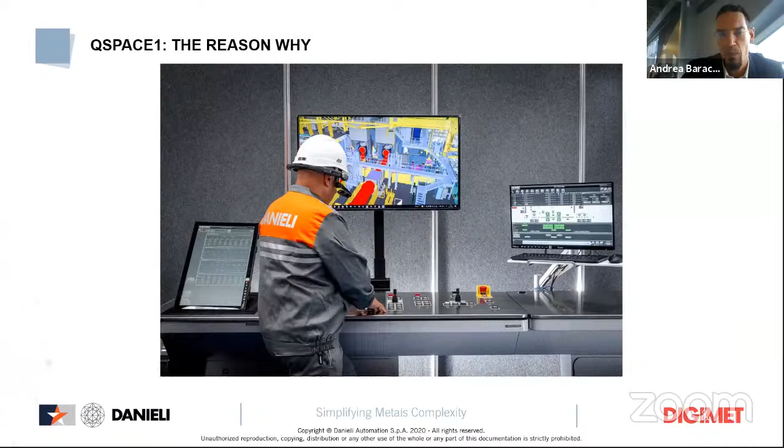So in conclusion, sustainability has shown to be an opportunity. The near intelligent plant is sustainable, allowing us to reduce costs, increase yields, and keep an eye on product quality. Operator experience is enriched, assisted by new technologies in daily operations, and all information is put together to give them a real picture of the actual situation at their fingertips, supported by instructions given by

artificial intelligence-driven algorithms. No man on the floor is also a must in our business, with a double aim: to reduce exposure to dangerous conditions for operators, and also to optimize the use of resources when driving a modern plant.

Collaboration is a crucial factor for daily activities, for maintenance purposes, and to solve issues very quickly with remote connection, with no need for material transfer or people movement, having immediate contact with the plant.

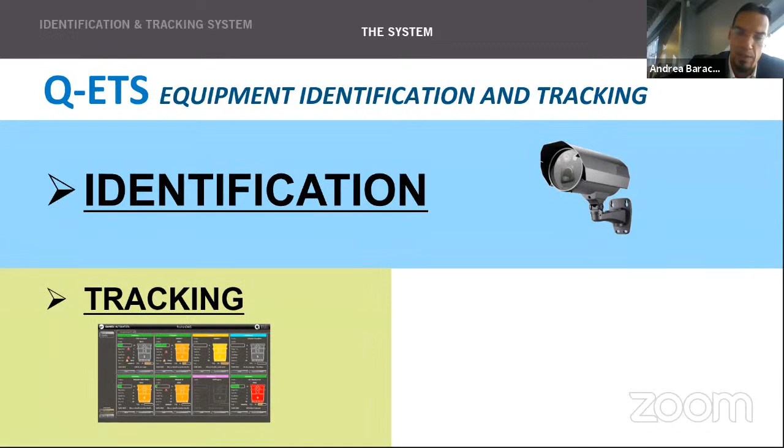One of the issues mentioned earlier during this meeting was the necessity to track equipment around the plant. One of the solutions I want to introduce is the Equipment identification and tracking system. Our solution is based on the need to track the physical presence of hot metal and steel metal ladles around the plant, to have real-time and 100% trustable information from sensors capable of detecting the presence of a steel ladle anywhere in the plant. Typically, this issue was solved in the past with manually performed operations.

So it was in the hands of the user, of the operator, to take notes about the ladles, assign ladles to the proper running heat, and coordinate maintenance activity based on the notes he took during the process.

We had the opportunity to test different technologies, and we found that some of them are not suitable, especially for primary and secondary metallurgy environments, where there is metallic dust and a lot of pollution disturbing, for example, an RFID system.

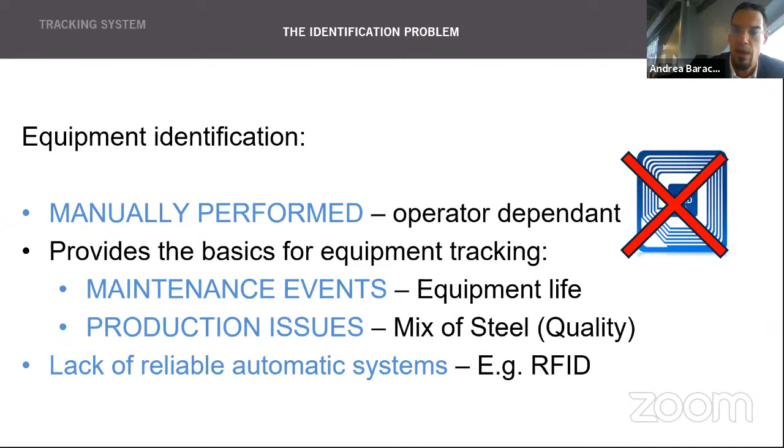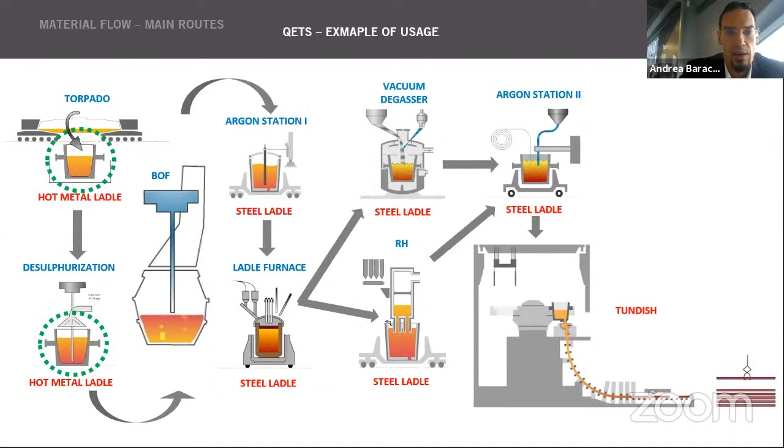We are aware of the critical aspects behind the identification system. We work in a high temperature environment, exposed to dross of material which can sometimes even damage the equipment. So our solution, applicable to any steel carrier inside the melt shop, ladles, tundishes or torpedo cars, is based on an encoded metallic plate and a vision system capable of detecting the presence of a ladle in a specific area, like you see on the screen.

On the left side, you have the image captured by the camera, which is placed in a fixed location. On the right side, you have a record of the presence of a ladle in front of the camera. The log is recorded whenever the ladle passes in front of the camera. So we immediately get the information of which ladle it is, the moving direction, whether it is arriving or departing, and the timestamp of those events.

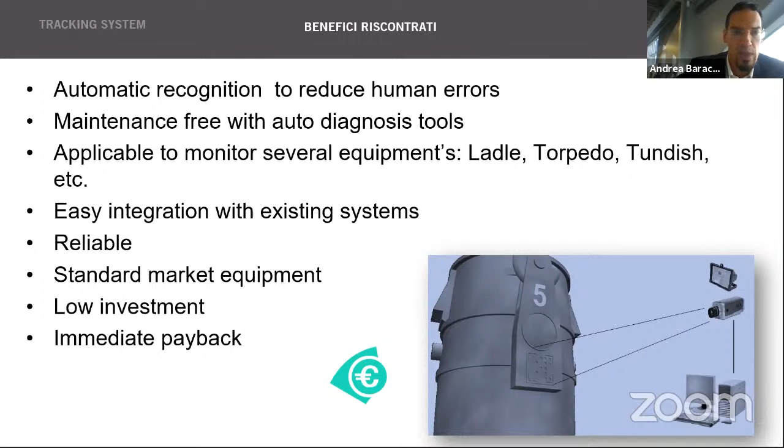A very simple system with already several installations worldwide, practically with zero maintenance required, apart from some cleaning from time to time, and with easier integration with existing automation systems.

We already have a few installations in Europe of this kind of solution showing 100% recognition capability, so it's very reliable. And the level of investment is very low compared to the possible issues you may incur when damaging a ladle or polluting the steel, for example, with the wrong grade.

Sorry for extending my presentation further than the topic, but I found it could have been useful for somebody to hear that Danieli has also this kind of small package available.

Thank you very much, Mr. Barachini. I recall back in 2012 we covered the Danieli Q3 pulpit, I think it was called the 3Q pulpit back then, with 3Q standing for quality, quantity, and quickness. It's wonderful to see how over the years the technology has been improved and developed over the generations to where it is today. Thank you for a very nice presentation.

So just to start with, what ABB is actually trying to master, or even mastering, is this: we have both the complete holistic view and also a point-specific view when it comes to digitalization of the metal industry or any industry for that matter.

So as you can see, what are the aspects involved when we talk about the complete metal industry: you have planning, stockyards, primary metal areas, hot rolling and cold rolling processing areas, and then shipping. So the complete plant starts from inbound logistics processing and ends with outbound logistics.

We are really focused in many places where we first facilitate end-to-end visibility, because traditionally, as many of you are aware, most processes are still working in islands. So we firmly believe in first connecting all of them and giving end-to-end visibility, and that opens the doors for optimization. And in each area we have solutions in place which can improve performance and optimize.

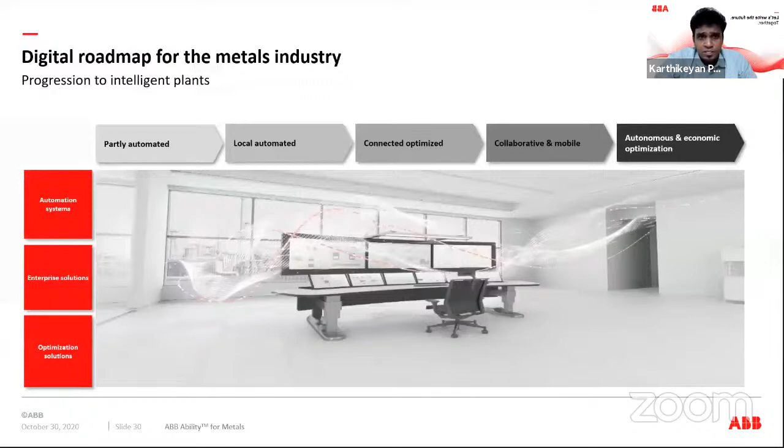I'll quickly move to one of our latest solutions. Just give me a minute to skip through that.

What we also want to talk about is optimization, ML, AI and so on. I'd like to introduce all of you to ABB Ability, Genix Industrial Analytics and AI Suite. This is a holistic analytics and AI suite for industries, which makes operations and asset optimization easier than it looks.

How do we really adapt to the Industry 4.0 digitalization phenomenon? It's about integrating all the data from OT, IT, and ET, along with expertise in enterprise-wide data analytics and industry-specific data models, and then ease of implementation and rapid rollouts, because this is more important.

Whenever you talk about an analytics suite, for example a predictive model, there are a lot of them, and it's really easy to talk about predictive models. What's more important is how easy it is to implement those predictive models and how rapidly we're able to roll them out, because building a model and implementing it can take anywhere between 2 days to years. So this really focuses on ease of implementation and rapid rollouts.

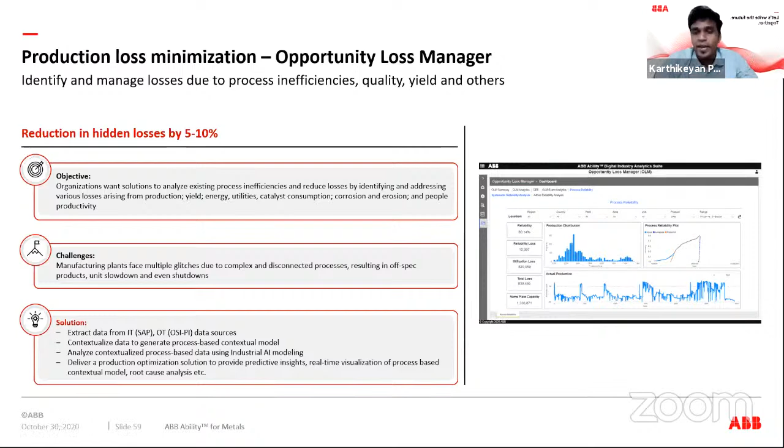So this hidden loss, or opportunity loss, is something inherent to every process and operation. What this module does is analyze your data and detect the opportunity losses, throwing it open to you. As you can see here, it calculates the reliability loss, utilization loss, and then the total loss. This really helps you get a business perspective, because a lot of us talk about solutions, but the first point of solving something is identifying the problem. This helps you identify the problems quickly so that we can start acting on it.

The next module is for asset integrity. When we talk about asset integrity, it enables a 360 degree view of asset performance. For example, let's say you take a mill as an asset—it can identify bad actors, reduce maintenance cost, and extend asset life with just the data that you have, just by processing that data, and then give you the dashboards.

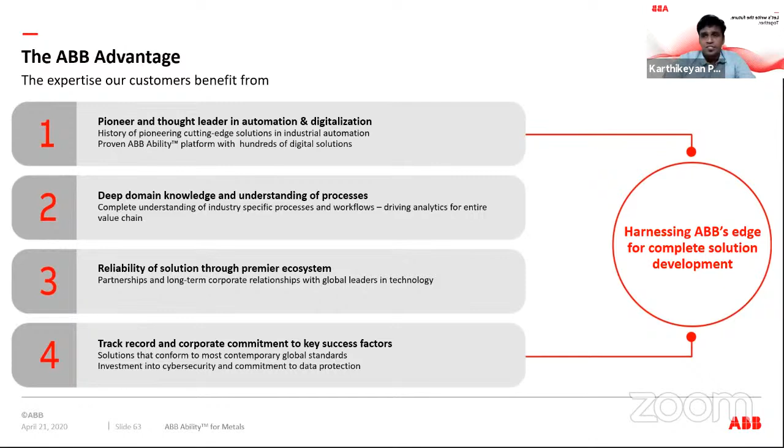So just to give you a perspective to close with, what is the advantage of the host of solutions from ABB? First, we are the pioneer and thought leader in automation and digitalization, with deep domain knowledge and understanding of processes. Through this, we provide reliable solutions through our premier ecosystem with a consistent track record—simplified, scalable, smart, speed, and secure. At the end of the day, with AI/ML models you need a good ecosystem that contextualizes the data and uses built-in modules to help identify problems and improve performance and optimization. This is readily available without much custom development.

Since all of us were talking about very point-specific solutions, I thought I would diverge a bit and focus on this. So, thanks for the opportunity. Thank you.